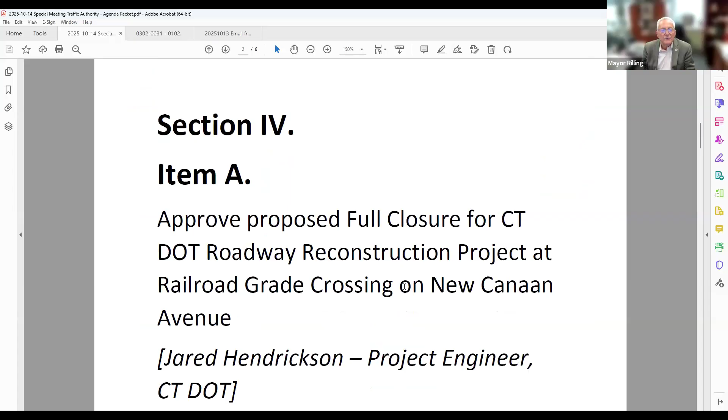I'd like somebody to move that for discussion. I move item A, section 4. Okay, that will be moved by Commissioner Collier Clemens. Who's going to present for the city?

So we'll have the state project team, DOT project team, present on this project. Darlene, if there's anybody in the lobby, you could elevate them.

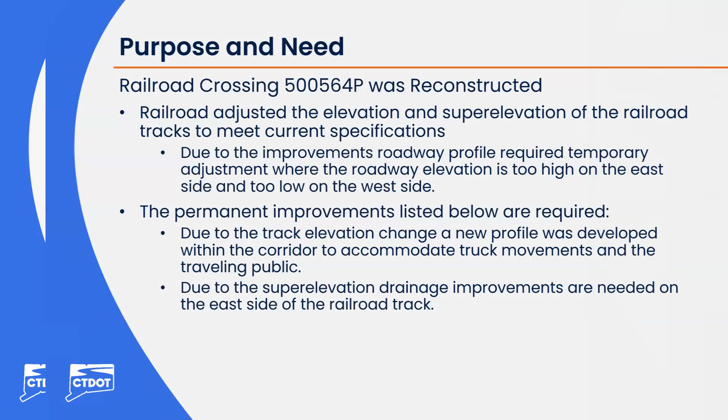Right now, the project purpose and need: the railroad adjusted the elevation and super elevation of the railroad tracks to meet the current specifications. Due to improvements, roadway profile required temporary adjustment where the road elevation is too high east and too low on the west side. The permanent improvements listed below are required. Due to the track elevation change, a new profile was developed within the corridor to accommodate truck movement and the traveling public. Due to the super elevation, water has been streaming across the tracks, and drainage improvements are needed on the east side of the railroad track.

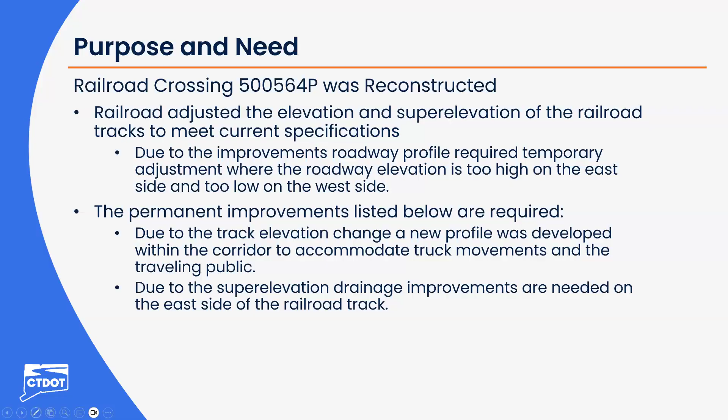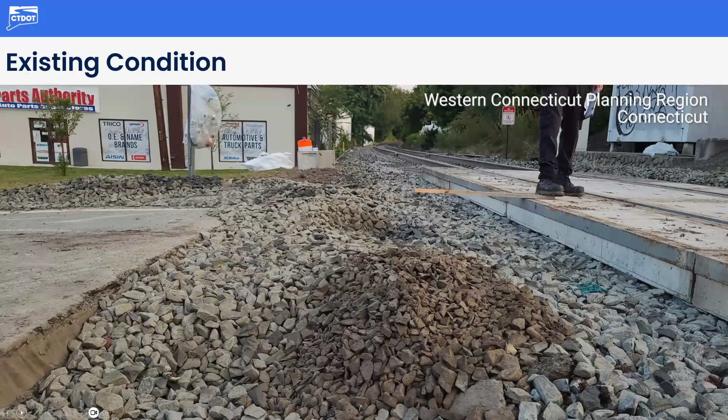Here's a picture of the existing condition. Metro North had to improve their tracks, and as you can see, they raised the tracks up approximately 8 inches. This is during construction, you can see the existing roadway below the tracks, how much the elevation has changed. The tracks are about 8 to 9 inches higher.

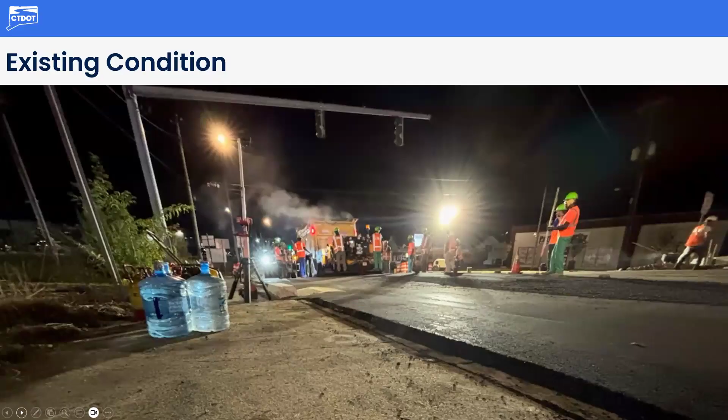This is when they were working at night to do the paving. You can see on the curb that the pavement has risen above the existing driveways also.

Here's the finished paving. You can see their final paving has actually buried some of the curb and some of the sidewalk. The catch basins are above the curb and sidewalk, and when it rains, the water will sheet off across the roadway.

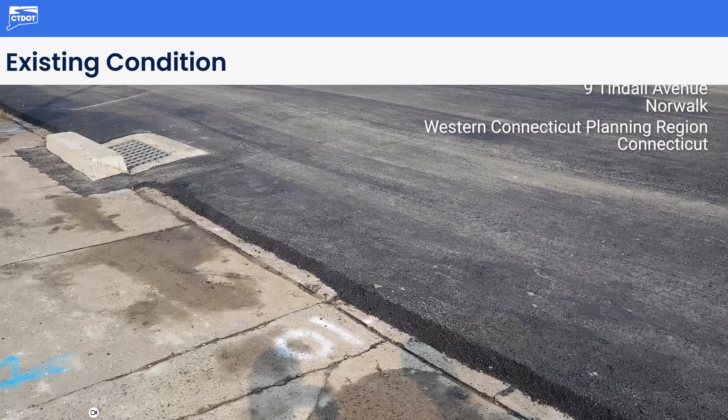This is showing some of the work. You can see the pavement is above the sidewalk and the curb on the left. And this is the final transition from the existing pavement to the new pavement.

I think this is a video showing what the roadway looks like with the cars traveling over it. You can see that they hit the hump and then cross the tracks, and there's another hump. I'll play that one more time for everyone.

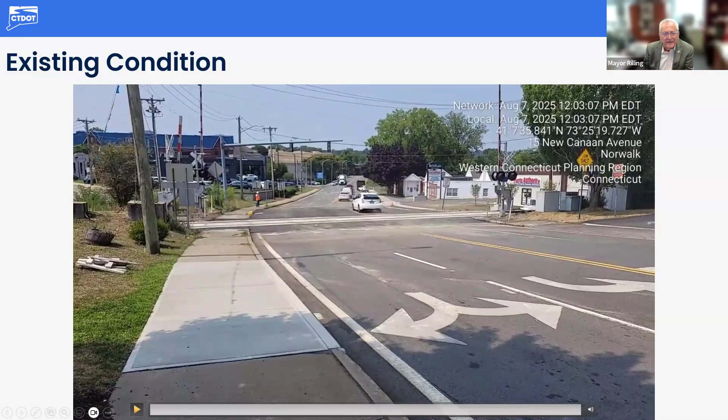So basically, you're just looking to correct those things right there where the cars come over on one side, they hit, and the other side, they hit the hump or the bump.

Correct, Mayor. That's what we'd be looking to do is smooth this out, improve the roadway drainage as well, and get everything so that every vehicle can make it across the tracks right now that needs to make it across the railroad track. How long do you think this will take, and what is the extent of the road closure?

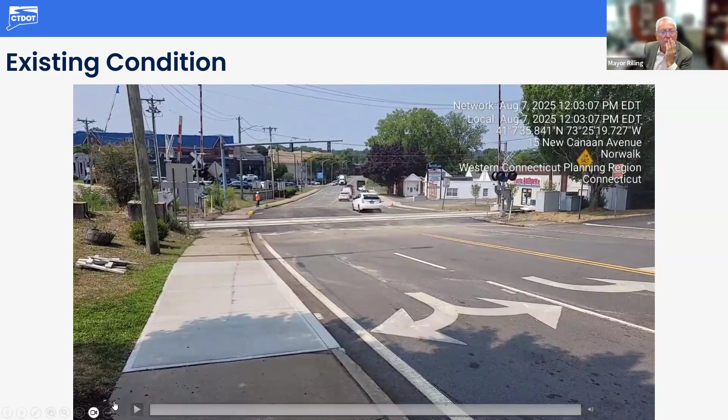Okay, Jared, if we can move on to that, we can explain that for the mayor. So the road closure and detour dates are, we're hoping to start tomorrow, 12 a.m., which is actually tonight, 12 a.m., which is tomorrow morning. And it'll last a week through 10/22, 11:59 p.m.

We're going to do this 24-hour shift, 2 shifts at 12 hours, accelerated schedule, trying to do this as expeditiously as possible. We know this is going to be a slight inconvenience to most of the public, but it'll be a short duration.

And so we may need a potential detour for the drainage installation, but we'll discuss with the contractor if they can do that in stages. That will start on November 1st, 12 a.m. for one night, and possibly another weekend outage for Metro North when they have an outage on 11/8.

So on those times that we see before us, the road will be completely closed for the duration. Correct.

Yes, besides for the potential need for drainage installations, either one of these weekends is when we're targeting to do the drainage installations during an existing Metro North track outage, because we have to go underneath the railroad and an outage is required. So we have to correlate our work with when they have a closure.

I have one request. On the north side of the roadway, the sidewalk doesn't connect all the way. I'd like to see if that can be included in this project, as long as we're going to be closing it for such a period of time.

Is that possible? Mayor, I'll have to get back to you. I have to talk with my management about the potential for that happening. But as of right now, it is not included in the project. Like I said, I will talk to my management and I will be able to give you an affirmative answer.

Well, if you could, Ben, if you can bring, or somebody can bring the picture of that up so I can stress why I'm so concerned.

Okay, would you like us to go through the detour plans, Mayor, or would you rather? Well, I just want to clear this up first, because I want to get this in.

Yeah, you can go back to the picture of where the sidewalk has a break in it. Looks to me, there's a possibility for some liability there, because a lot of foot traffic right there. And if somebody were to trip, that would be, we've seen what happens. People trip, and the next thing we know, we're paying out money for their medical expenses and for other things.

Jared, do you happen to have a picture right now in your presentation, or otherwise I can pull up something? Let me share one more time.

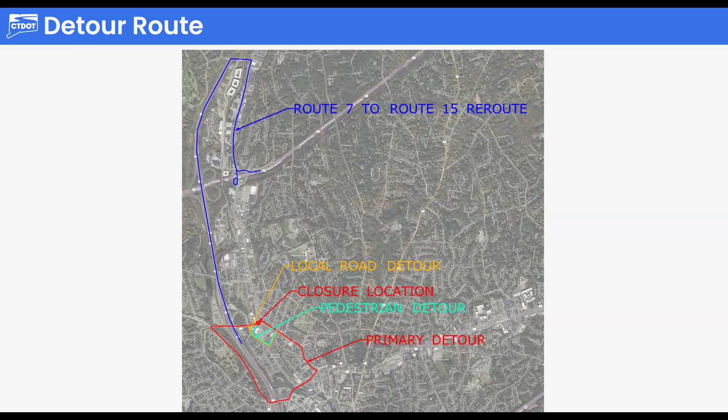Here, Jared, I actually have a picture from this morning I can share if you stop sharing for a moment. Yep, it's all yours, Ben.

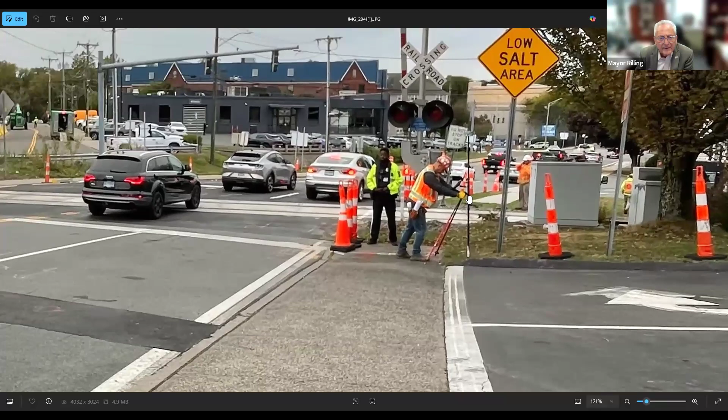Yeah, that's what I'm talking about right there. So that, well, yeah, go ahead.

It was our understanding during the initial installation of the railroad upgrade in August that there was an extra concrete panel installed here in case of a future sidewalk. So there is a bit of a gap here, and I know there are challenges with it because of the existing railroad signal infrastructure, among other things, and the accelerated timeline you guys are working on.

Jared and Brett, if you want to talk with management and consider it, we would greatly appreciate that. I hear you, Brett, on running conduit so that you won't have to close New Canaan Ave again if we end up going ahead with some sort of future sidewalk installation. But we also want to take advantage of the opportunity if possible.

I can't see from here, but I'm pretty sure when the crossing rail goes down, there's something on the bottom part that blocks people from crossing on the sidewalk. Is that correct? Right now, because there's no sidewalk, there's actually nothing across the sidewalk.

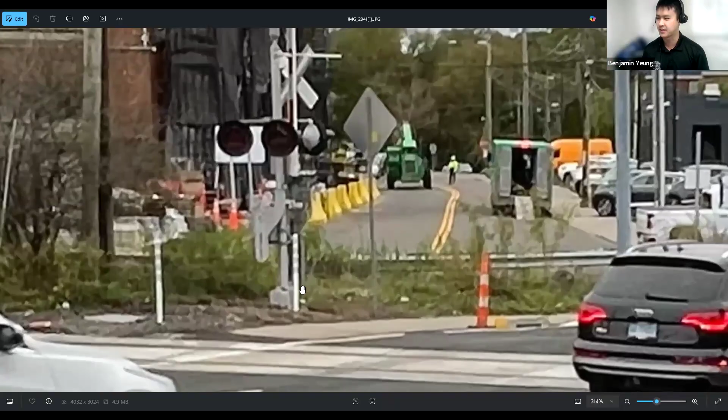The signal is right in the middle of where people would kind of be walking, and it blocks the rest of the roadway. On the other side, the crossing arm is actually set behind the sidewalk, so it does block the sidewalk there. And Ben, if you swing a little bit more, you'll see that there's an additional gate that closes off the other approaches.

Okay, Rob Bradway from Office of Rail. As you rightly noted, when the crossing was reconstructed, we did have Metro North go one panel further to the north in anticipation of completing the sidewalk.

We're currently in discussion with Metro North on what it's going to take. First of all, we need to do an MUTCD required diagnostic review with the railroad, with DOT, with FRA, and with Norwalk on what devices would be needed for the sidewalk extension.

We're pretty sure we're all just going to agree to copy what's on the south side of it, and then work with Metro North to come up with a plan to move these existing devices and put the devices on the opposite side of the street.

All right, so maybe we can go into the detour now, and then the commissioners can have an opportunity to ask any questions they need to ask. Okay, Jared, I'll turn it back over to you with the detour plan.

And is this the same detour that was used when they closed it the last time? Correct, I'll hand it over to Brett for the detour now. Yes, it will be the same detour.

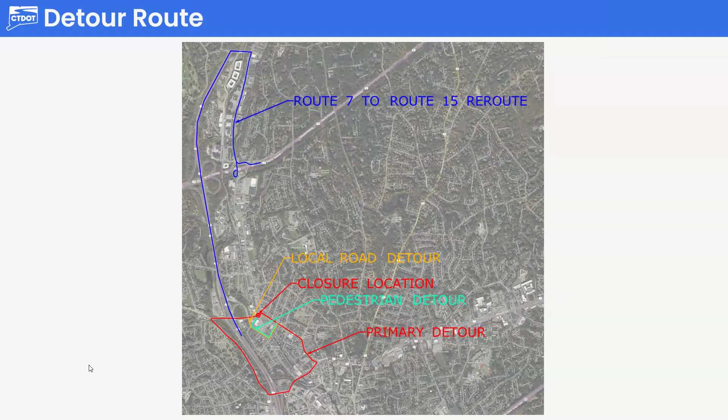We are going to make a couple changes to the temporary signalization and the actual closure itself based on some lessons learned from the August closure, but 99% of this is going to be the same. So the only real changes are going to be on this slide.

Since the Dunkin' Donuts driveway will be closed, we've coordinated that with the property owner. We're going to push the actual closure point out to the intersection, and then rephase the intersection of 102, 222, New Canaan Avenue at Main Street, so that there will be only two phases: a north-south phase for Main Street, and then a pedestrian phase to cross Main Street.

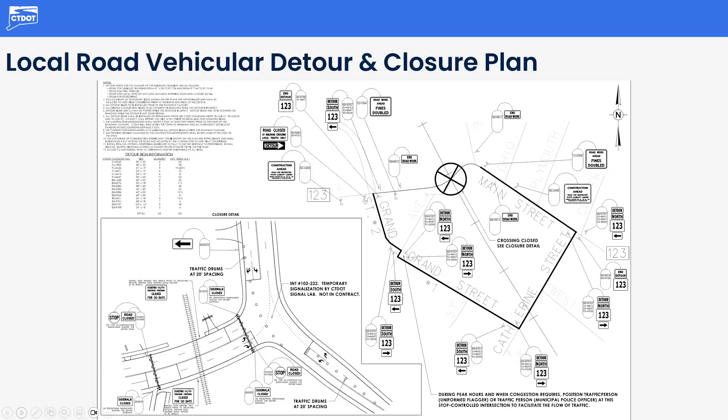The Signal Lab, when we get the go-ahead to do this closure, will rewire the signal so that the no right turn and no left turn blank-out signs will be on, since there will be no right turn or no left turn onto Route 123.

For intersections 102-202 and 102-221, that's New Canaan Avenue at the Route 7 ramps, and Main Street at Catherine Street and Center Avenue, right now we're just going to be monitoring the signals for any changes that need to be made.

Currently, there aren't any phases that can obviously be removed or new phases to be added to make the signals function better. So the signal lab will be on site when we get the go-ahead to do this closure to rephase Main Street, the Main Street New Canaan Avenue intersection, and they will also be monitoring the two intersections, 102-202 and 102-221, to look for any potential timing or phasing changes to make the traffic flow more efficiently.

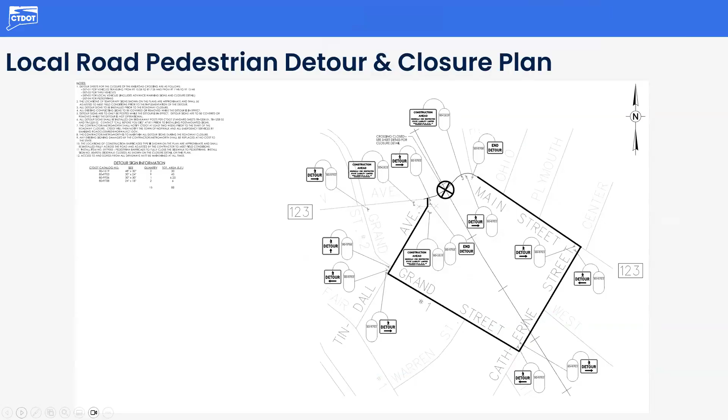Yeah, so the PED detour will stay the same. All of the detour routes will stay the same. We made some minor changes to a couple of sign placements based on going back through Ben's comments from June before the detours were approved, and some feedback we got during and after the August detour on things like the VMS signs.

So I made a few minor changes there, but the routes are the same. 95% of the signs are the same. The only thing we're going to be changing is the actual closure detail and doing a little more temporary signalization to make people's lives a little bit easier at the Main Street and New Canaan Avenue intersection.

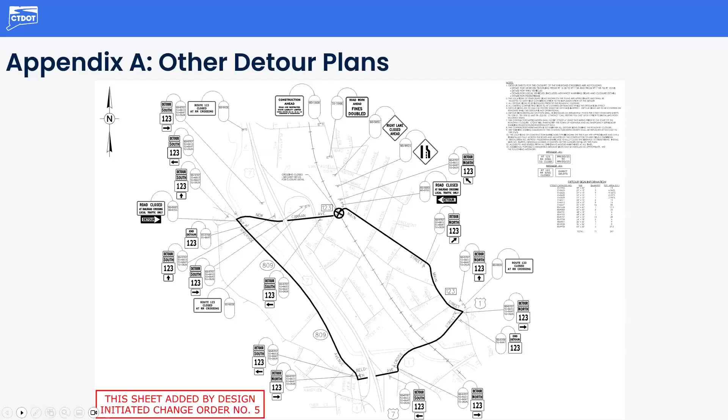Commissioners, any questions or concerns?

My question is regarding the on-site signalization. Since the road is going to be closed tonight at midnight, will those personnel be there at that time, or are they coming tomorrow morning, or how long is it going to take?

Right now, I believe the plan is to have them come first thing in the morning. But I have the Signal Lab's phone number, so after this meeting I will text them and give them the exact closure time and when they plan on getting out there. Thank you.

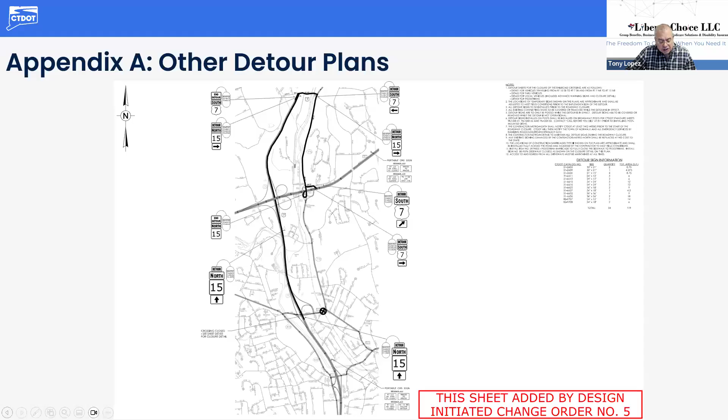I have several questions. On the schedule that was displayed a little earlier, on the road closures and detour dates, where reference was made to 11/1 to 11/2 and 11/8 to 11/9, that schedule, obviously everything was subject to change and revision and update, but that wasn't reflected on that schedule or on the handouts. Am I correct, or was it?

Correct. That was something we discussed at a drainage meeting yesterday. It was deemed that the drainage was pretty feasible, and we're just going to finalize the design. We need to get it approved by Metro North Railroad. That's the next step, and then we'll know for sure what work we can do. But preliminarily right now, we can do the work.

I have a utility coordination meeting today, and based upon how that goes, I can tell you 100% whether we're going to include the drainage work or not. But that meeting's at 11 o'clock today. So that's more tentative, and it will be integrated with the schedule reflected on the handout that makes reference to October 22nd to November 25th.

Is that correct? Yes. Okay, help me reconcile that date I just mentioned, the 25th, but then up above on the first paragraph, construction is to be completed December 1st. So what's that small little gap? I'm just trying to understand.